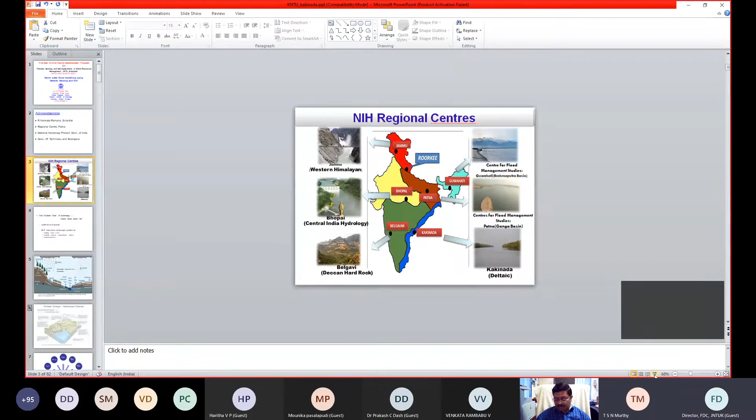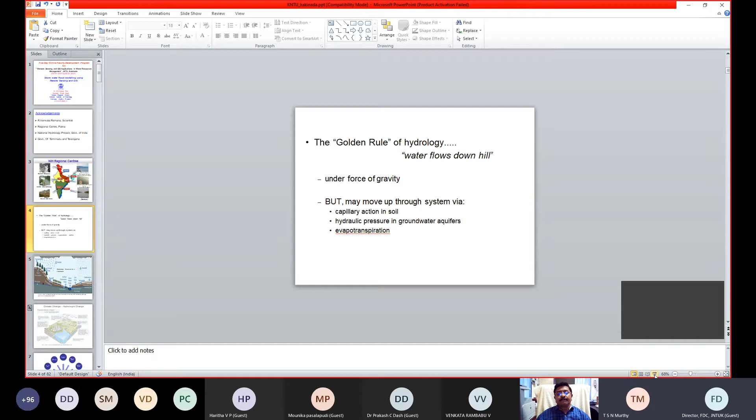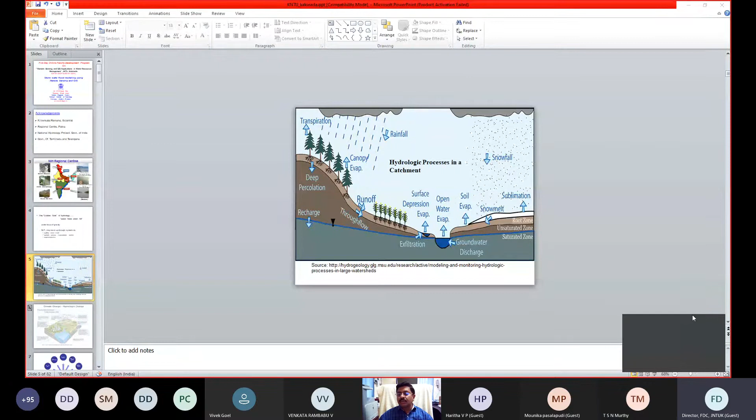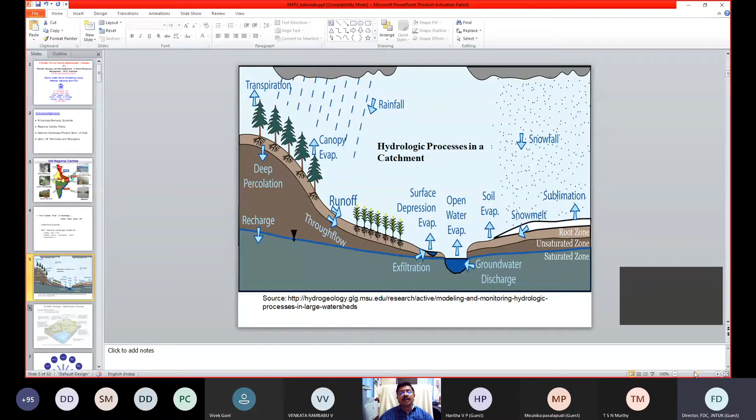Sorry, sir, sorry to interrupt, sir. Your PPT is not moving, we are still seeing only the first slide. Oh, really? Now, which slide is displayed at your end? Only the first one. I have already gone to the 4th slide. Please stop sharing and restart it, sir. Now it is okay, we can see the third slide. We can see the different slides, but not in full screen. We can zoom it on our screen. Okay, without wasting much time. Shall I continue under this mode? Yes, sir. Continue, sir, please. It is perfectly okay, sir. Okay, fine. Thank you.

So with this diagram, what I want to say is when you talk about stormwater flooding, stormwater is nothing but rainwater. Why do we call it stormwater? When the rainfall excess converts into runoff, that particular storm which directly creates runoff, we call it stormwater. So the moment rain falls on the surface in urban terrain, when the top 20 centimeters is impervious, what will happen? Immediately overland flow takes place, then slowly it gets converted into runoff.

If you have a natural surface with good infiltration, then it will convert to deep percolation and go into groundwater recharge. Here the blue line indicates the groundwater table. We are very much interested in the process of the first 20 centimeters, because the moment it exceeds the infiltration capacity of the soil, overland flow takes place. That overland flow is converted into runoff and immediately joins the stormwater drains, whether roadside drains or properly designed ones. Otherwise, what will happen?

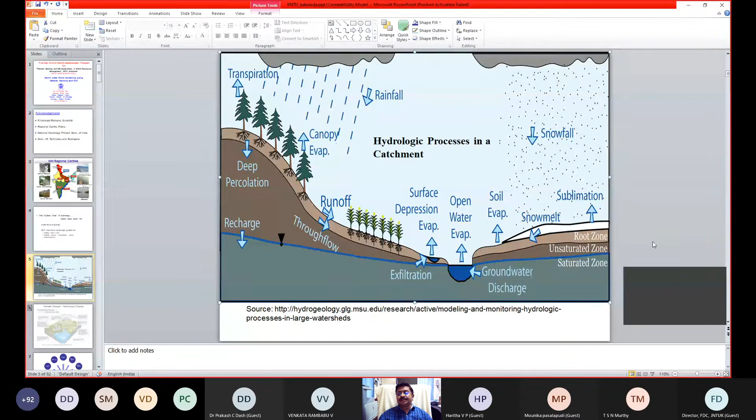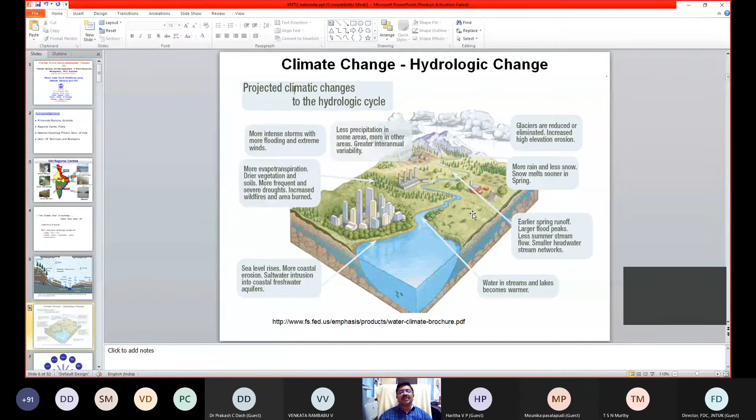Now we are talking about climate change. One is the big way it is coming into the natural hydrological cycle, and sometimes it is disturbing. More intense storms with more flooding and extreme winds - there are predictions about the hydrological cycle, whether it is sea level rise, floods or droughts. Extreme hydrological events are going to come in future. That is one of the projected climatic changes from a hydrological perspective.

Look at this particular diagram. We have classified into various themes the impact of climate change, in the perspective of stormwater flooding. So it will come to this angle.

Change in runoff pattern - that is one of the most important aspects. Another important point is decrease in number of rainy days; that is most important from the hydrological perspective. And another important factor is increasing rainfall intensity and change in monsoon pattern. These things are very important when you talk about stormwater flooding.

Why is it so important? Let us take a small example. Suppose in the month of August, total rainfall is say 20 centimeters, 200 mm. Earlier this 20 centimeter rainfall used to occur over 14 days. Now the same amount of rainfall is occurring in 7 days.

So now you can visualize which event is more beneficial for us. As a hydrologist or water resource expert, he would always prefer the 20 centimeter rainfall to occur over 14 days instead of 7 days. Because even though it occurs in 7 days, if all your water bodies and reservoirs are already filled up with antecedent rainfall events, then you cannot store this water, or you do not have time for it to infiltrate into the subsurface. It simply overflows and joins natural depressions, water bodies, rivers or drains, and travels quickly to some other area. So as hydrologists, we prefer a 20 centimeter rainfall occurring over 14 days rather than the same amount occurring in 7 days.

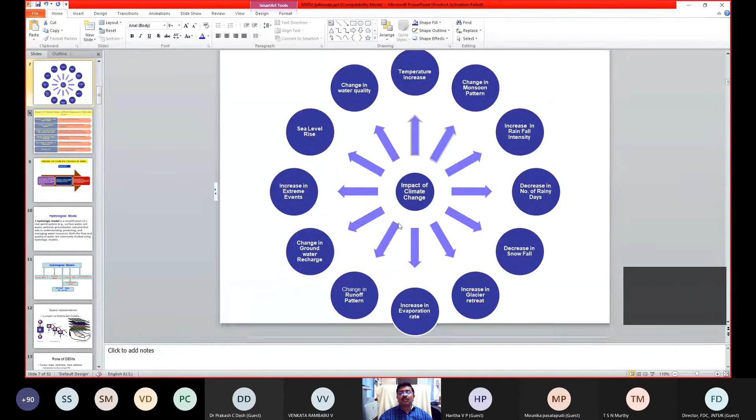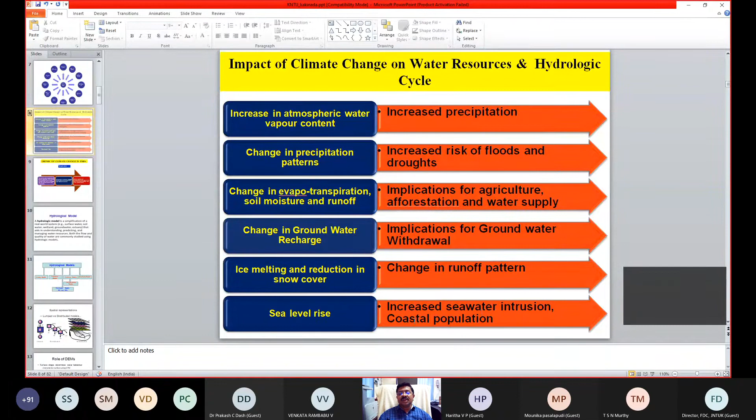A small change in the hydrological cycle will inherently affect various processes and parameters, and ultimately it reflects in our day-to-day activities. These things are most important, especially sea level rise, especially in coastal towns like Mumbai, Calcutta and others. They are struggling with increased seawater intrusion affecting coastal populations - all these are affected areas. So one should try to visualize to what extent climate change will affect our hydrological parameters.

Similarly, temperature is also one of the very important aspects. Mean annual air temperature rose at 0.57 degrees centigrade per 100 years during 1881 to 1997. This is a very interesting statistic. Then somebody said, okay, 100 years, 0.57 degrees centigrade, what will happen? Nothing will happen, this is very minor, but it is not so.

I will give another example to visualize the temperature change. If in a human body, normal temperature is 97.8 Fahrenheit, if I am right, if it reaches 100, then the entire human body metabolism will be disturbed, and you will get headache, fever, etc. Temperature change is very small, but the entire system collapses.

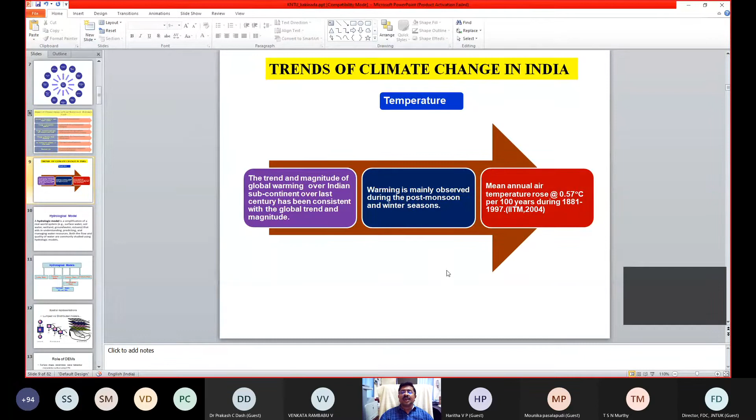Similarly, if Earth's temperature rose by half a degree or 1 degree, you can't imagine the type of impact that takes place in terms of flora, fauna, and all climatic parameters. That's why researchers are much more worried about this temperature increase of the Earth. So this is the most important.

With this background, now we want to work with hydrological models. A hydrologic model is a simplification of a real-world system that aids in understanding, predicting, and managing water resources. Both the flow and quality of water are commonly studied using hydrological models. So any hydrological model is capable of tackling your quantity and quality issues. That's what we are working on.

Remember, a hydrological model is not the only solution. It is one of the solutions to understand our system or manage resources. It is something like, as engineers, we use a calculator most frequently in day-to-day calculations. Why is a calculator required? A calculator is a tool where we can perform arithmetic operations very fast and most correctly. With these two advantages, we go for a calculator.

Similarly, hydrological models are tools which use remote sensing and GIS as input parameters. These models also help us understand the relation between various hydrological processes, and how they are dependent on each other. If you increase rainfall by 10%, what could be the changes in other parameters? We can do such analysis at reasonable accuracy. That's why we use this tool as a hydrological model.

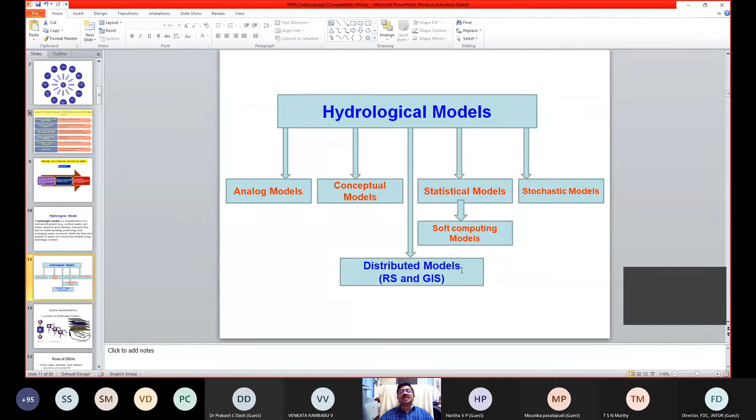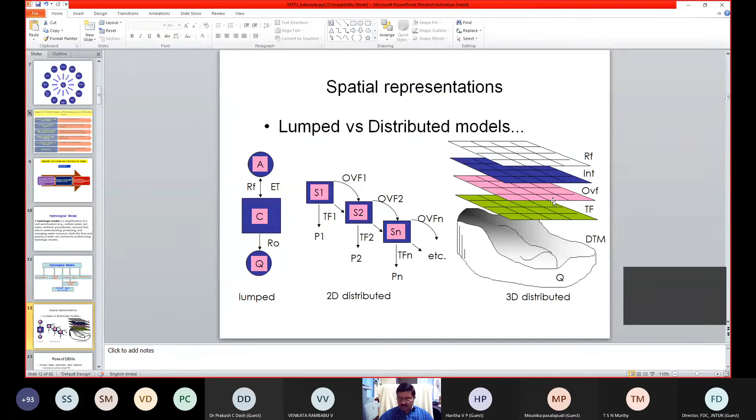Can you imagine our very old engineers earlier? They used to work on hydrology from the Survey of India topo sheets, where they would get the drainage pattern. From that, they tried to estimate the drainage density, the first order length of the slope. At that time, before the remote sensing and GIS advantage, they used to have a curvimeter, planimeter, and all that stuff to get the catchment area. They used to work by hand on Survey of India topographical maps.

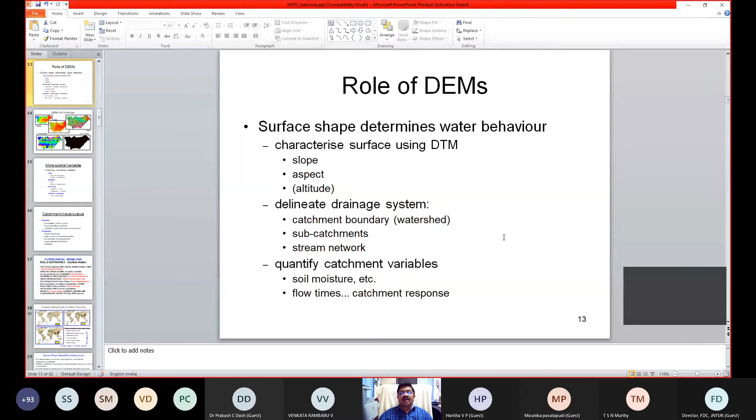Now with the advantage of DEM, we can do the entire work within no time. This is one of the biggest advantages in water resources, handling of our DEMs. If you get a better accuracy of the DEM, then you definitely come out with good accuracy in your quantification of the runoff, or sediment, or any other parameters. So these are some of the DEM based thematic maps which we can derive in a GIS framework very easily.

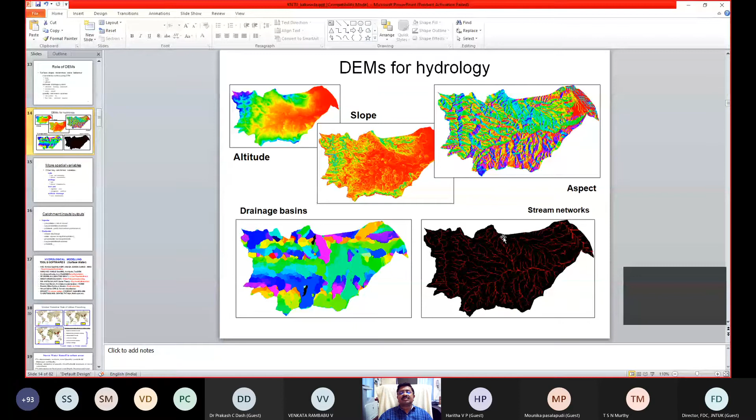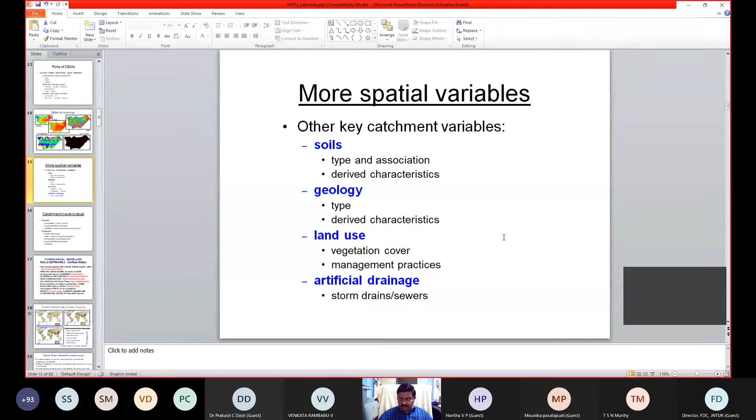Apart from those parameters or thematic maps, we also have to have soil information, geology information, land use, and artificial drainage. Natural drainage you will get from the DEM, but especially artificial drainage like stormwater drains, sewers, and all those things, we have certain limitations, because you cannot get these artificial drainages very clearly in the public domain DEMs. So this is one of the limitations, on artificial drainage. Otherwise, the rest of the things we can handle very nicely.

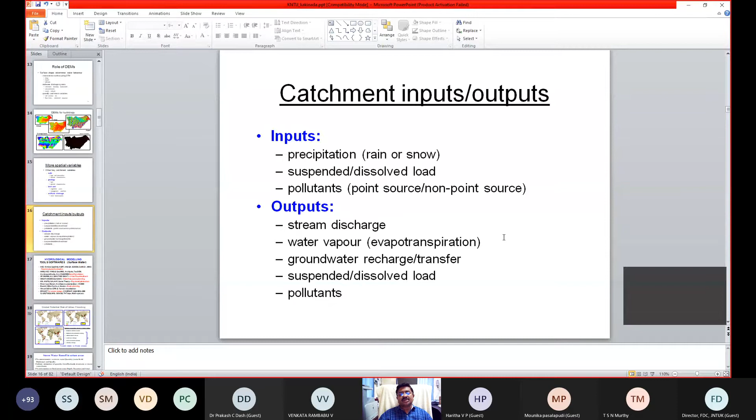In any hydrological model, we have two sets of parameters, input parameters and output parameters. As input parameters, we basically have precipitation and suspended load or pollutants, and we have outputs like stream discharge, water vapor, groundwater recharge, and pollutants.

Okay, now I made a small attempt, especially with this type of gathering where most of the research scholars and faculty members are associating in this faculty development program. I tried to put some of the very popular models which are available commercially and in the public domain in the entire world. So these are some popular hydrological models. Anybody interested can Google it and know better what the purpose of each particular software is. If you know a bit about all these softwares, then you can really choose depending upon the circumstances, the project, and the situation where you want to use modeling as a tool to solve real life problems. So for that, this slide is very useful.

Okay, there are some models like HEC-RAS, HEC-GeoRAS, all GIS based softwares mostly. Some of the things which I have highlighted in red color are the purposes where you can straight away pick up the things. We are interested more in urban flood, sediment, etc. This is the SWMM model, where we will see subsequently some case studies using this model. And XP-SWMM is the commercial product of the public domain SWMM model. Okay, so these other models are used for various purposes in hydrological investigations.

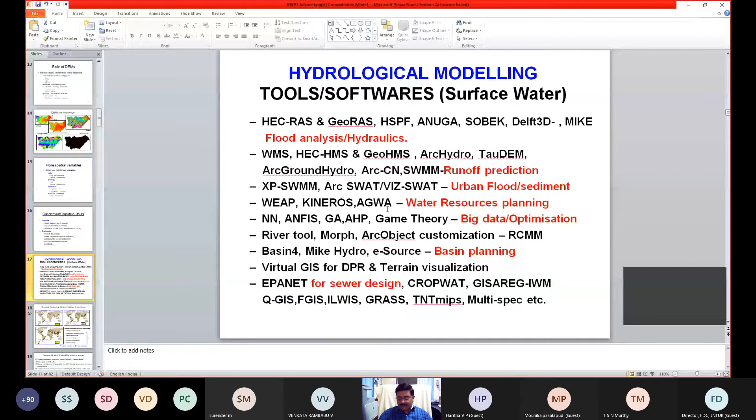Okay, next. Look at the situation of the urban flooding scenarios from 1970 to 2025. You can see the red spots are increasing, not only in India, but in many other places. Why I'm showing this particular figure, look at this carefully: multiple and uncertain drivers for future change. These are all the changes which are going to come in the future, and because of these changes we are getting transient shocks versus chronic stresses.

Shocks we already got. One shock recently, the Hyderabad flood, is a big shock for us. For the planning engineers and decision makers, the entire thought process has changed now. They realized the importance of the water bodies and connectivity between water bodies, the importance of the stormwater drains, and how to divert the flood water during extreme events.

So each natural event will change our thought process. Earlier we have not considered climate change scenarios in our designs. Now whoever is doing any hydrological designs, they put an eye on the projections which are available up to 2090, 2080. So that data also they are trying to put in designs, validate it and check whether our designs are safe or not.

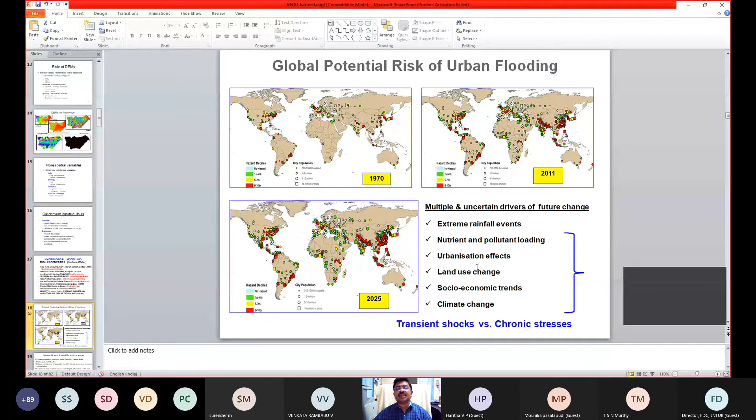Extreme rainfall events, nutrient and pollution loading, which is unknowingly increasing exponentially in the surface water bodies as well as groundwater, urbanization effects, land use changes, socio-economic trends and climate change. Because of all these parameters, we are having more stress on the natural resources, and we are even witnessing some disasters in recent times. For that purpose, it has become very popular.

And these are our experiences after conducting a few case studies in cities like Chennai, Hyderabad and Patna. We got some very quick observations, which I would like to share with the participants here. No measurements on stormwater quantity. When you start working on modeling, no measurement, no data is available. You will hardly get maps showing the cross section of the existing drain. That's it. At a particular rainfall event, what was the water level in the stormwater drain? Nobody monitors it. Then we start working in an indirect way, using hydraulic structures to get some quantity information.

Then in a city or any town, there is no official information on flood prone areas of any municipal corporation or city like Hyderabad, Chennai. They should display everywhere in that city that these are the flood prone areas with respect to some rainfall events, so that people themselves realize, oh, our building is in a flood prone area. Whenever rain comes, we should have an eye on the forecast mechanisms. Such maps should be widely displayed in schools, offices, everywhere in the city, because flood prone area information is very useful to the common public, so they can visualize where their house, office and school are located. So in every city these maps are to be prepared. Flood prone areas of urban areas, that is most important.

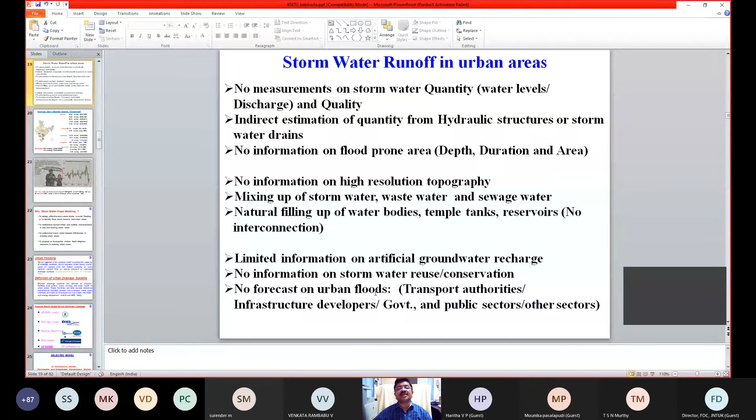That's the most important aspect. Because you're all faculty members, I would like to share one particular point in a lighter sense. When my son passed 10th class, immediately I got so many calls, SMS and all those things. They introduced themselves about the intermediate college, and at that time I was really surprised how these people got my number, how my mobile was flooded with the information.

So whenever a natural calamity is going to come, all our mobiles should get flooded with the information that wherever you are living, you will get this type of rainfall or flood and all those things. Nowadays, I was very happy that whenever thunderstorm predictions are coming into the mobile, IMD people have made some mechanism. So a small alert will come into my mobile: in your area, in the next 1 hour, 2 hours, thunderstorms are going to happen. I felt very happy to receive such alerts, which can save many people from natural incidents.

So that is the state of the art, and people are transforming research results in whatever possible way to reach the common man. That is a challenging task. So let us have a small glance at the highest daily rainfall events, because after working on a couple of studies, I always record these highest rainfall events across the country, especially in South India and some popular cities. In Mumbai, can you imagine, in 2005, 94.4 centimeters per day. We never recorded that anywhere in India.

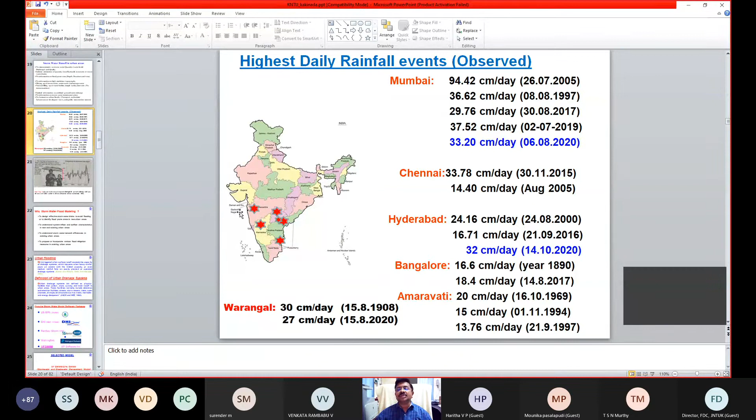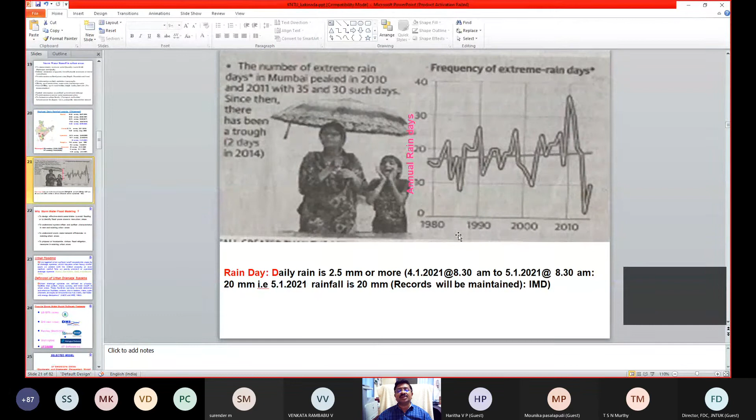And the other extreme happened in 2010 and 2011, the highest rainy days, then immediately in 2014 we got just 2 days. So this is the order of the day where we can have this information. The number of rainy days is so important in our present analysis.

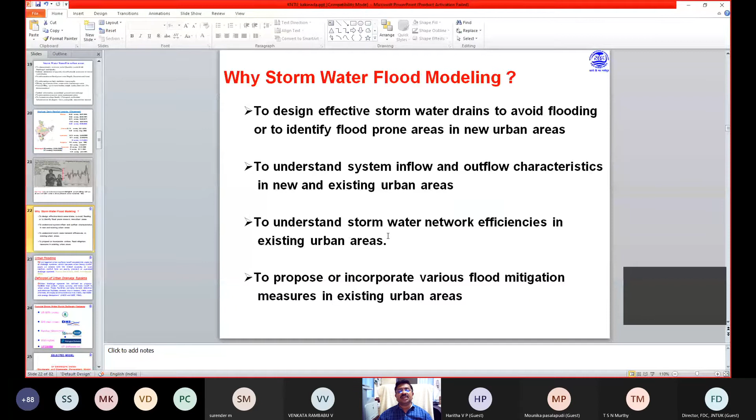Most important is to propose or incorporate various flood mitigation measures in existing urban areas. So this hydrological modeling is useful under these circumstances. Okay. Now next, I don't want to give an example. We have only half an hour with us, and urban flooding is different from riverine flooding.

So one should understand here, urban flooding is triggered when surface runoff exceeds the capacity of the drainage system. That means when you want to divert rainfall into the drains, if drains are designed under capacity, what will happen? It overflows. That overflow also creates flooding on the roads and all those things.

Okay, so this happens when heavy rainfall pours on sewers with limited capacity, or even medium rainfall falls on a poorly planned or operated drainage system. What do you mean by operated drainage system? Are you really operating any drainage system? Operated drainage system is something related to maintenance, interconnectivity of the drains.

If the connection is not properly maintained, what happens? Then the joint will blow up. A lot of stormwater will come out on the roads. Okay, poorly planned means we have not designed properly. Okay, so a lot of siltation is taking place, a lot of plastic.

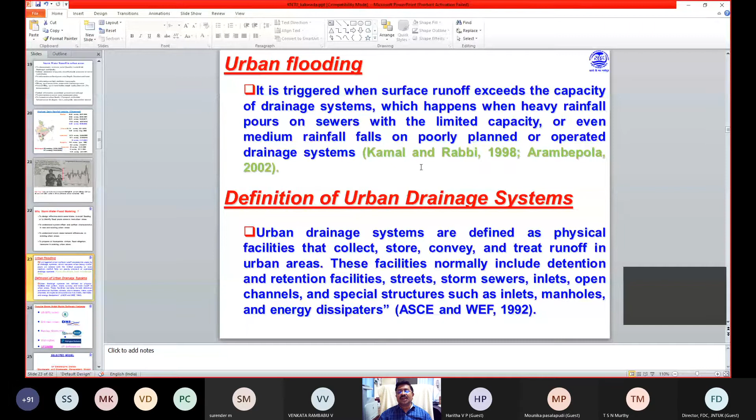So these things are very, very important, maintenance and those things. Design is one aspect, and the other aspect, operation and maintenance, is very, very important. As I said, I have listed out the hydrological modeling softwares. Here I show only those related to stormwater flood modeling, which are very popular across the entire world.

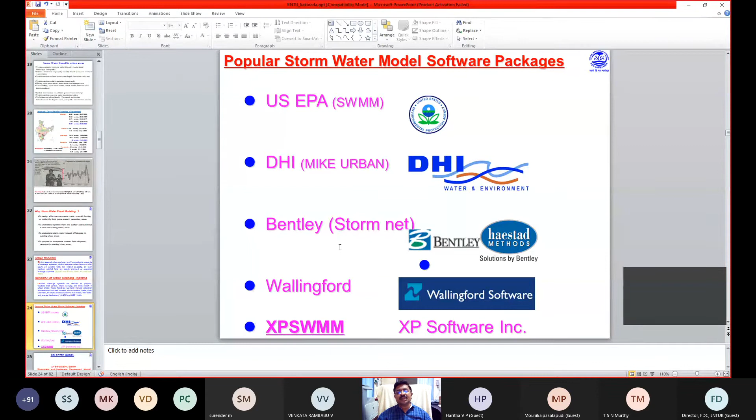We have US EPA public domain, and we have DHI commercial software, Bentley StormNet, Wallingford tools, and XPSWMM. We got an opportunity to work with two softwares, and even though NIH has DHI MIKE URBAN, at Kakinada Center we worked on the first and last two, both the public domain and commercial software. These two have the same engine, but the working style is a bit different. So these are all very popular softwares.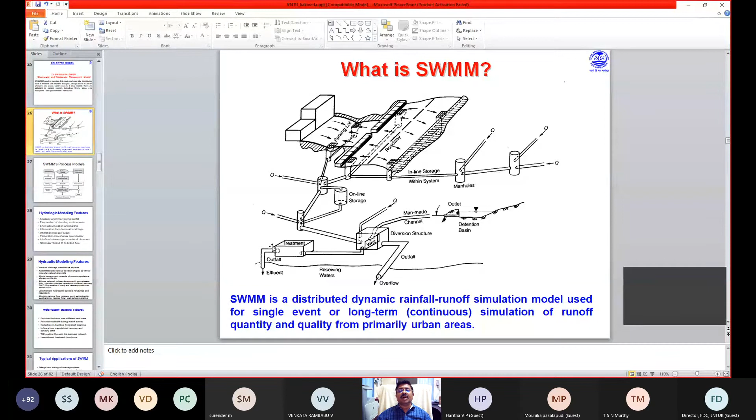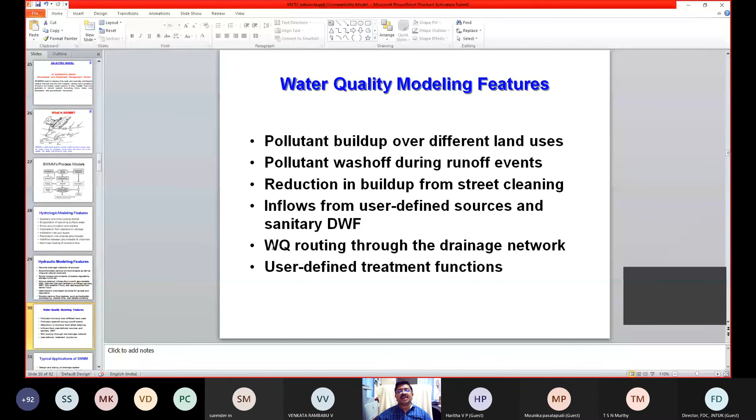So now I want to skip the details about SWMM, how it works and all, because I want to give more feel about the case studies, how we have done them. So I want to skip 3 slides. Of course, SWMM is capable of tackling quantity as well as quality.

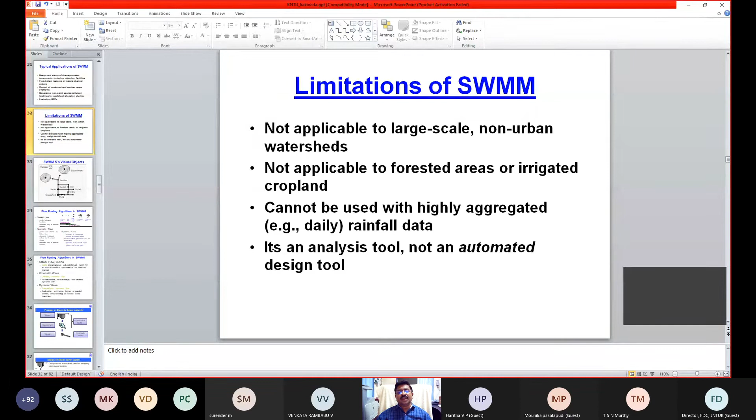Then the limitation of SWMM is that this software is not applicable to large-scale non-urban watersheds, not applicable to forested areas or irrigated cropland, and cannot be used with highly aggregated rainfall data. That means beyond daily rainfall, there is not much use. Okay, monthly, weekly, yearly, we cannot use. There is no use basically. Okay, these are some of the limitations of the software.

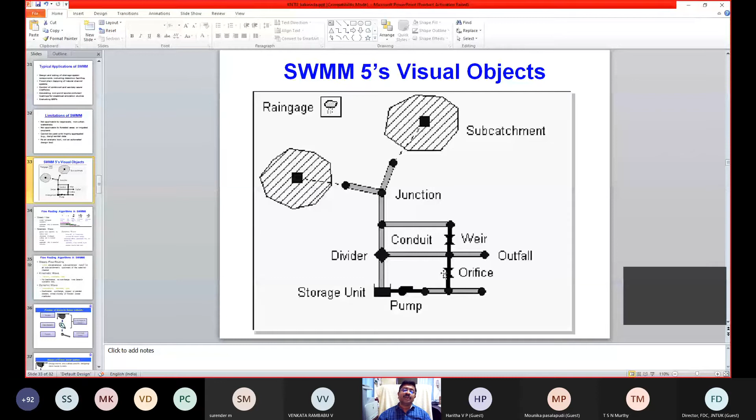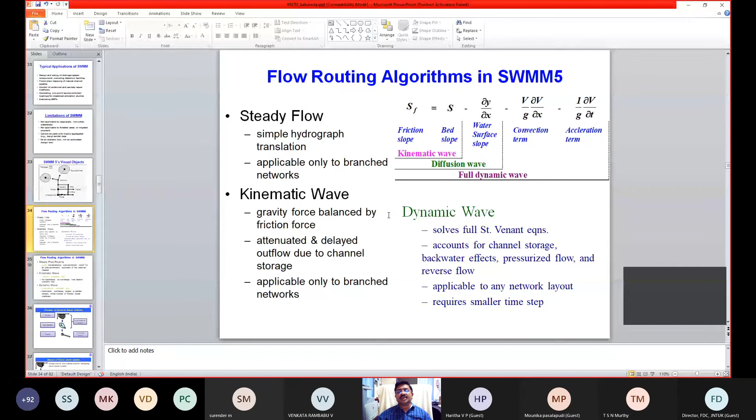So in a nutshell, when anybody is working on stormwater modeling, it is a combination of hydrology and hydraulics. This is a classical combination of the two subjects together. Then we can effectively solve these issues. These are the basic equations which are used to solve the kinematic wave, diffusion wave, and fully dynamic equations. These are the basic equations we used in this modeling. Then we have the unsteady.

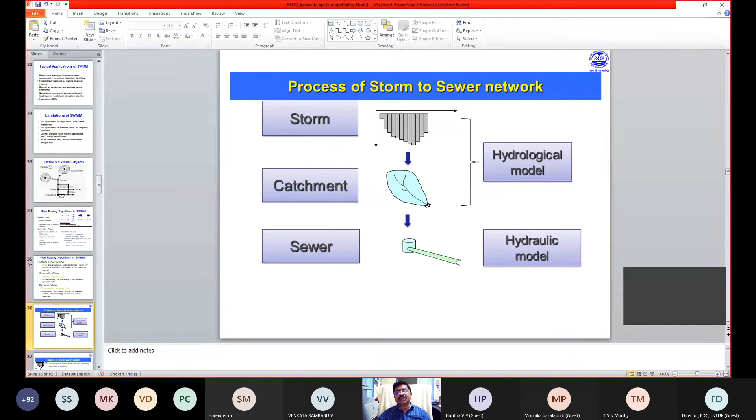Now look at this better representation of the same diagram here. This is the rainfall event. It is falling on the catchment, an urban catchment. Converting rainfall into runoff is the hydrological modeling, and routing of this runoff through these drains becomes a hydraulic model. So these two combinations are very, very crucial.

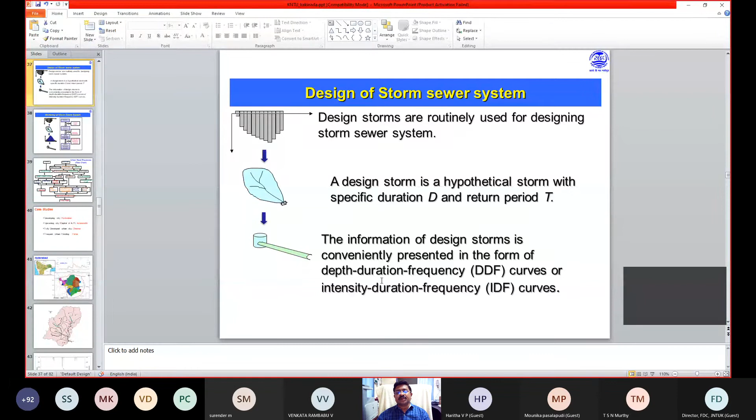Input wise, design storms are routinely used for designing the storm sewer system. A design storm is a hypothetical storm with specific duration and return period. The information of the design storm is conveniently presented in the form of depth-duration-frequency curves, so that we can use it directly in the model.

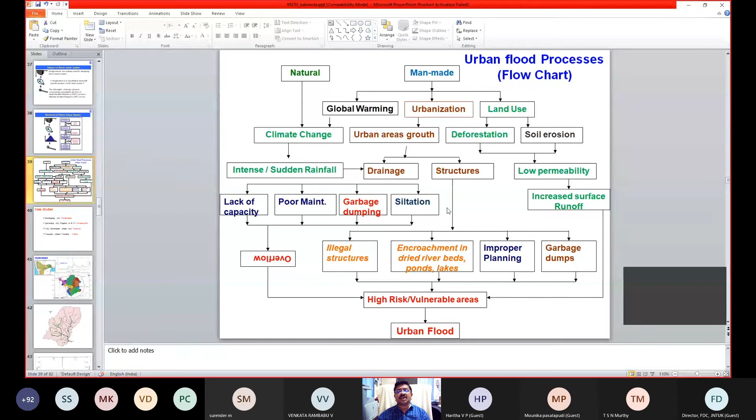I don't want to read the big flowchart here due to limited time, but you can see urban flood processes. There are natural reasons and man-made reasons, and finally both are causing urban floods. Man-made: global warming, urbanization, land use changes. Similarly, drainage structures, low permeability, increased surface runoff, coming straight to the high risk vulnerability zones. These factors are directly or indirectly associated. Not only one town, in any town most of the activities are similar to this flowchart.

So we have a few case studies with us, and one is Hyderabad city. I put it in the category of developing city, and a very new upcoming city like Amaravathi, capital of Andhra Pradesh. Nothing is there. You have the free privilege to design your own storm drainage network, keeping in view the future highest rainfall events. In other towns and cities it is not possible, because the city is already developed. If you want to change any designs, it's highly impossible, right?

I'm giving an example of a fully developed city like Chennai. Even if I come out with alternative designs, who will implement them in Chennai city? There is no scope. Nobody will allow. Lots of issues, political or whatever you call it.

Another city has frequent urban flooding; the town itself is flooded every monsoon because the geographical location is like that. One side is bounded by a river, the other sides by canal systems, and whatever rainfall occurs on the town has no drainage to enter into other places. Whenever there is high rainfall, water levels in the streams and river are very high, so whatever water is collected within the town is absolutely accumulated.

So, 4 different scenarios: developing city, upcoming city, fully developed urban city, frequent urban flooding. These are 4 real life situations. The easiest is the upcoming city; designing stormwater there becomes much easier than solving the flood mitigation of other cities.

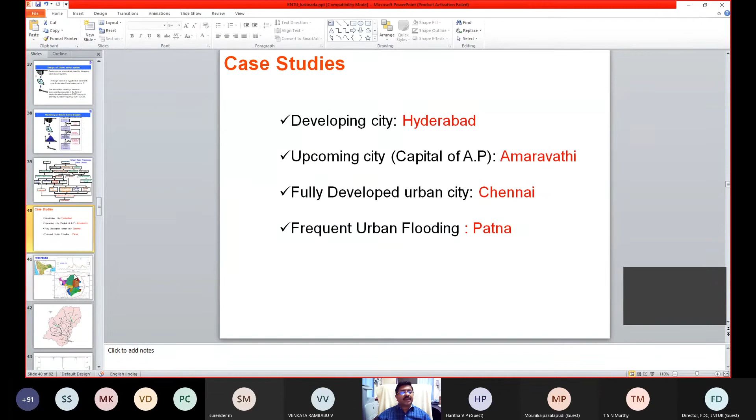Hydrologists start working on the DEM and superimpose administrative boundaries on a subwatershed. These two are different boundaries, and that creates a lot of issues. But in Hyderabad city, the administrative zones are almost equal to the sub-basin boundaries, so water resources can be handled very effectively in these areas.

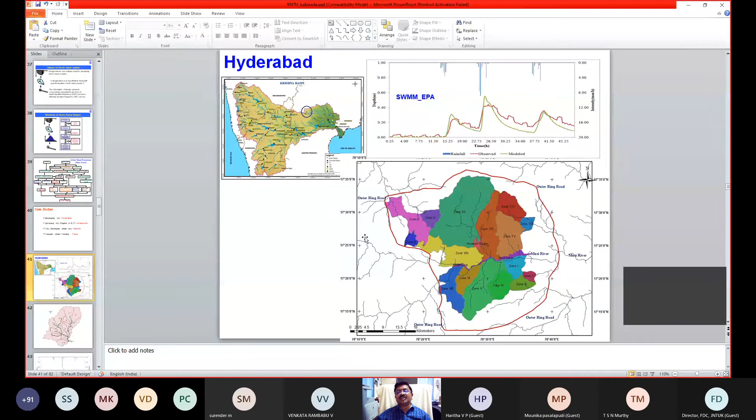That is one of the positive things noticed in the case study at Kukatpalli area. This is the schematization of the entire drainage network, and we were able to finally come out with this type of observed and modeled rainfall events in that particular area.

As I said, you will not get any measured discharges in the town, but in this case we installed our own equipment to measure water levels in the stormwater drains, and we also measured short interval rainfall data in the field. With the help of both these unique observations, this type of modeling is only possible, because validation of the model is very important.

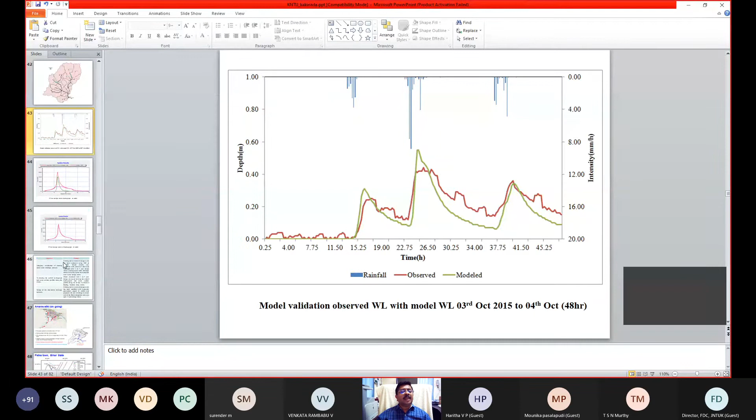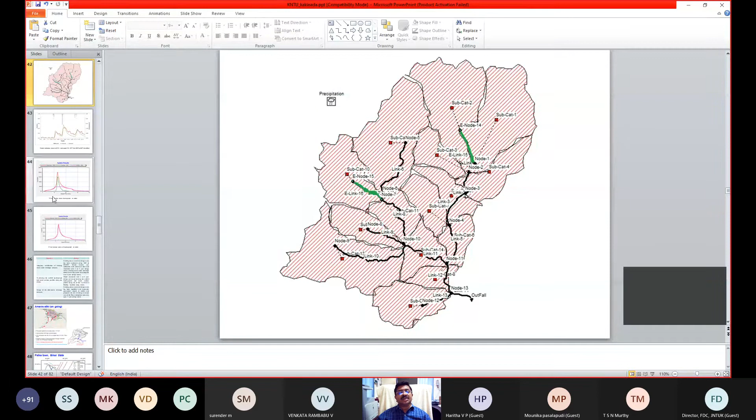Suppose there is no water body at all in this subwatershed, then rainfall minus some losses is equal to the flow observed at this particular point. The same phenomena can be observed in terms of a hydrograph.

So after hydrological intervention, the authority requested NIH to suggest some modifications or new links, so that the green flood portion should not come into the catchment at all. That means whatever rainfall occurs should equal the outflow. Accordingly, we changed some of the designs, assuming that in this particular watershed there is no water body.

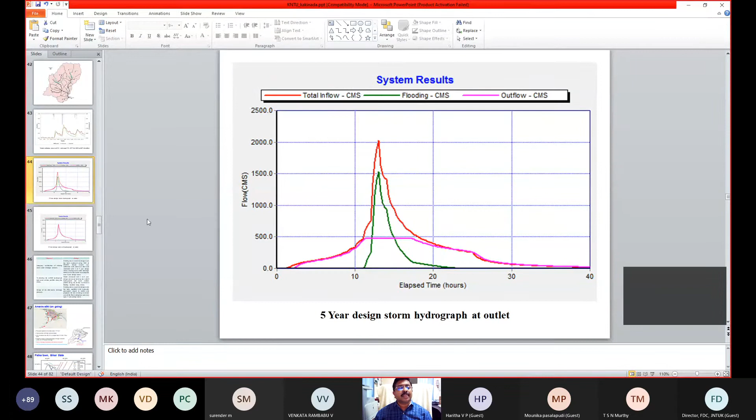So this was checked with the 5-year design storm rainfall event. This is one way of checking what was done in this case study. For an already developed city, where somebody has already designed the network, after 20 years the department wants to check whether their existing stormwater network is safe or not with the coming high intensity rainfall.

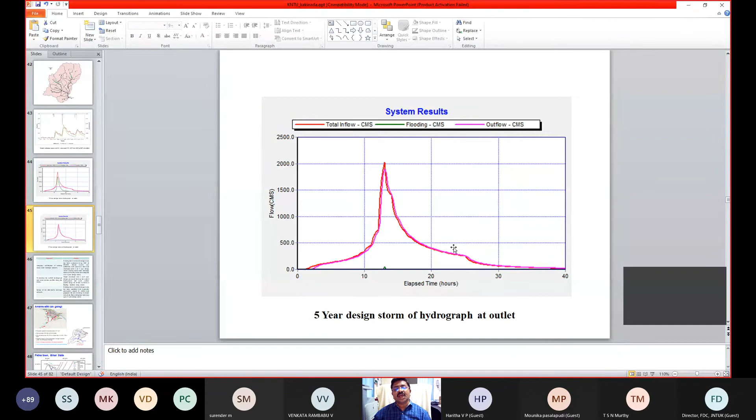They asked if we could give suggestions by adding small new links or diverting some links downstream or otherwise. So we suggested some mechanisms and ensured that the inflow equals the outflow. That is one of the case studies we did for Hyderabad city near Kukatpalli area.

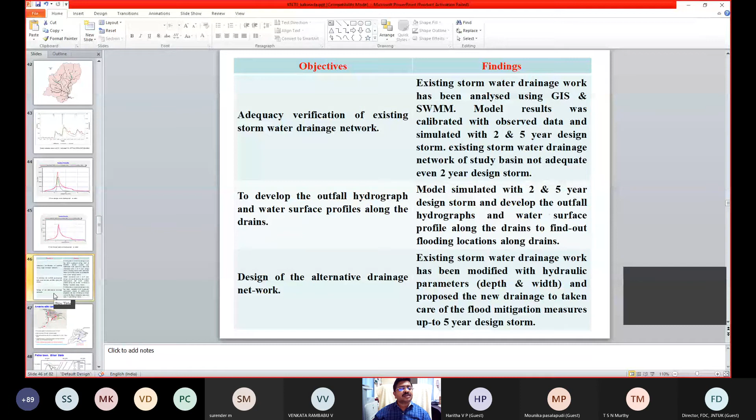So whatever stormwater drains you want to plan, make sure that not only the water falling within the capital area creates flood, but also consider the water from outside the capital area, since there is a big catchment area here.

Whatever flood is created in this area also comes into the capital area, and these two flood waters should be safely reached to the Krishna river. That is a challenging task. Otherwise, upstream flood will come into the capital area. Then how can we safely discharge our flood water into the Krishna river? That is a major challenging issue.

In this case, the bed level of the Kondaviti Vagu is almost equal to, or sometimes below, the bed level of the Krishna river. What will happen? If some small flood comes, backwater comes into this particular Kondaviti Vagu. At that time, if the Krishna river is fully flooded and all of a sudden we get heavy rainfall in the Kondaviti Vagu, tell me the situation - how will the flood water reach the Krishna river because of these hydraulic conditions?

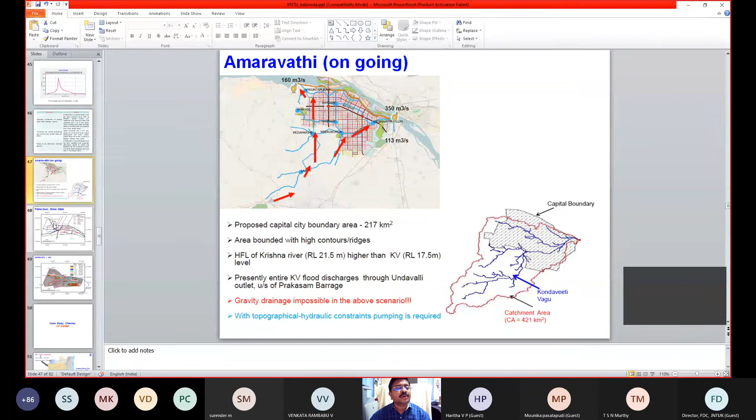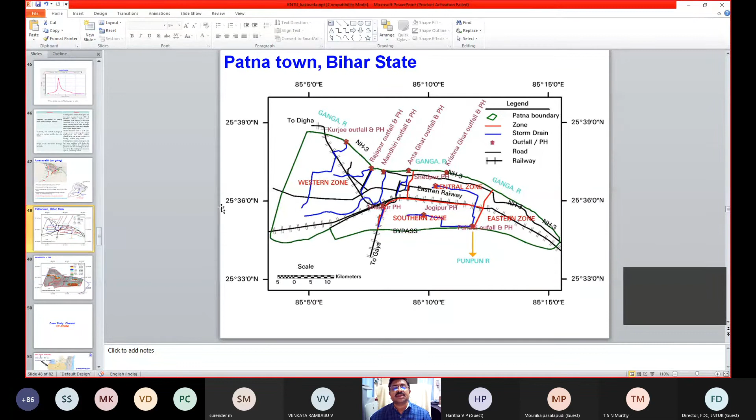Then they asked which rainfall creates how much flooding - we should provide a map with respect to rainfall. We asked them first for the contour information at 1 foot interval, so that we could give a better output for various purposes. With the advantage of that particular DEM, we have prepared this output. Now you can see.

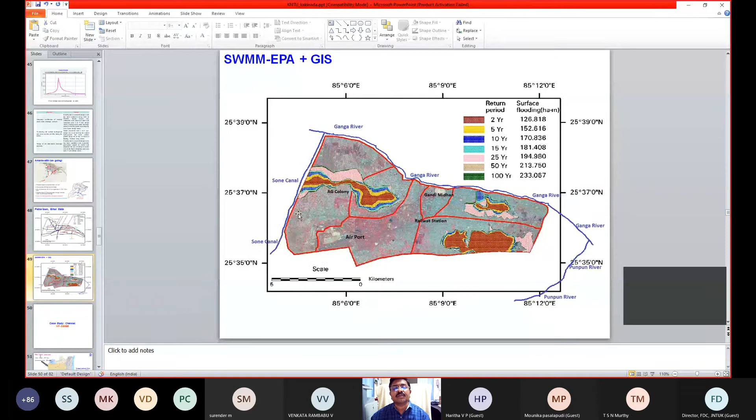Then the third case study is Chennai. I will finish this case study within 10 minutes. For the Chennai case study, I will show the study area - look at this area.

This is not fully based on the administrative watershed - administrative boundaries and watershed boundaries are not equal for all watersheds, except one which matches here. This I have demarcated as the Otteri Nullah. This is a small drain having a catchment of 30 square kilometer area.

They want to solve the flood issue in this particular area. This is the area where they used to get a lot of flooding and a lot of inundation taking place. So here we want to test our hydrological model, how to solve this problem of stormwater flooding using some hydrological model - that is our challenging task.

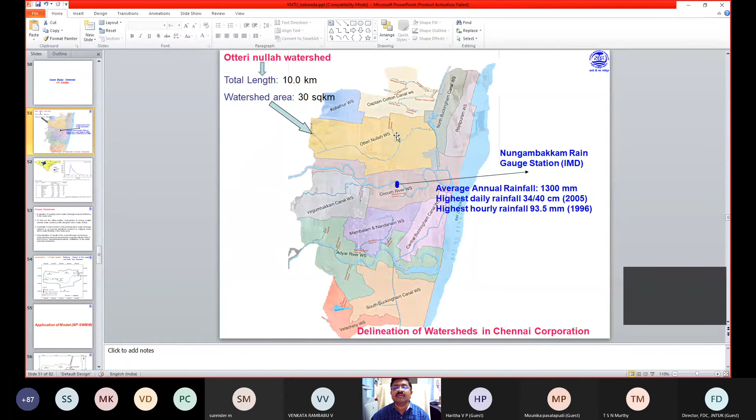To solve the issue we have borrowed a tool that could help us. Straight away, when we initiated this work and looked for data, nothing was available except the IMD rain gauge station very close to this area - that was the only rainfall data, rain gauge data, available with us. We realized that if you want to do a hydrological model in a small scale basin, you invariably have to have observations. So immediately we designed our own network of observations.

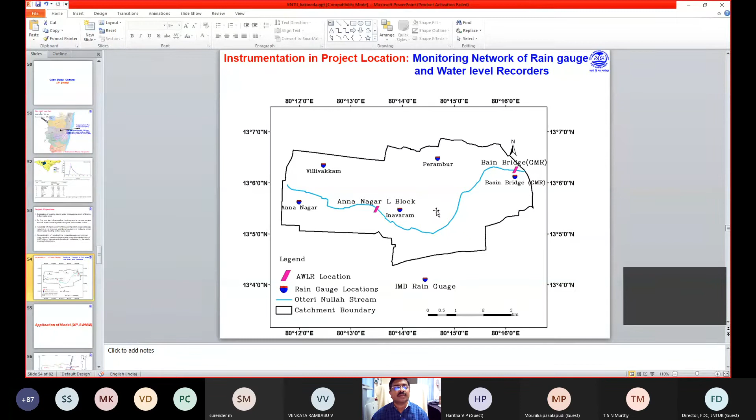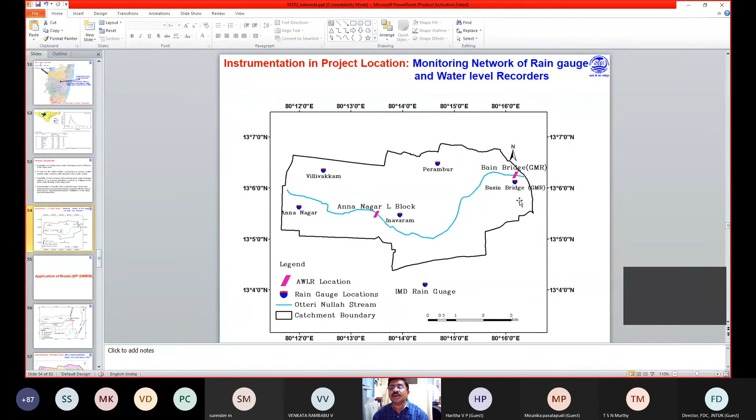Like these are all the rain gauges - we have established the rain gauge network. We also established automatic water level recorders in this small drain at 2 locations. So we started monitoring the water levels as well as rainfall over a period of 2 years, so that we got a good number of spells. Before finalizing this network, we also took into consideration the hydrological boundaries, which I then superimposed. So this is our catchment, and the catchment outlet is connected with the Buckingham Canal.

Buckingham Canal is connected with the Bay of Bengal, and nearby we have another stream called the Cooum River. Why do you need all these things? Because if somebody is working on any basin, one should have an idea about hydrological boundaries. Not only boundaries, we could also see if any reservoirs are upstream, and whether their excess flows will reach into this area or not. There are so many things associated.

Especially if you see Kerala floods, Chennai floods, after the floods the government constitutes a committee, and the committee comments, if you read, this particular sentence is always common: these floods are due to sudden releases of upstream reservoirs. I found this common sentence in many reports. So these things also we have to consider. If you are not considering this and are only talking about the rainfall falling within this catchment, that is not sufficient.

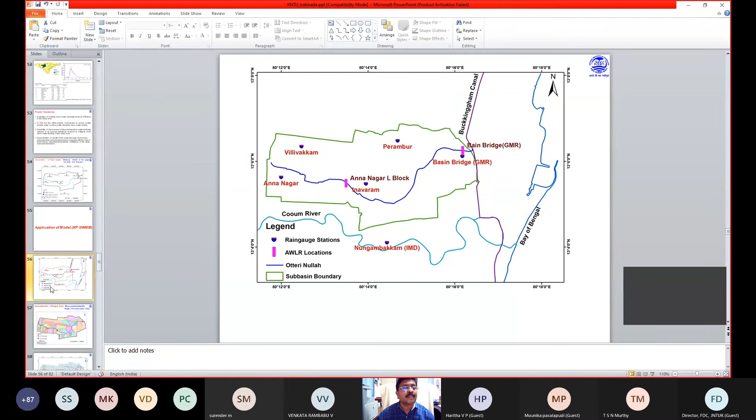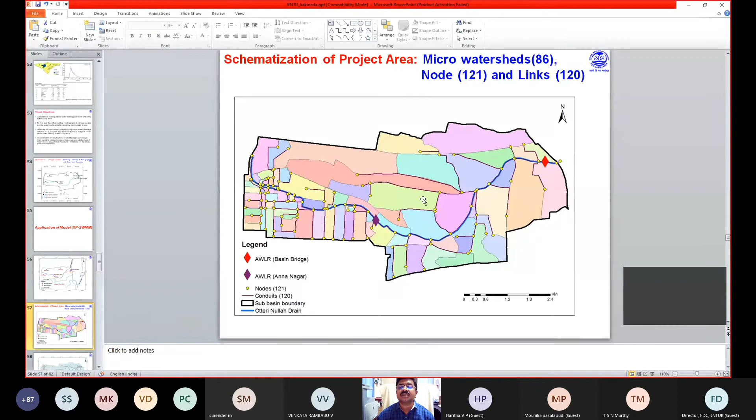So this is our hydrological boundary, and I demarcated the same watershed into 86 micro watersheds based on local drains as well as DEMs. Similarly, I converted this particular basin into a nodes and link model. Then I started working with this model.

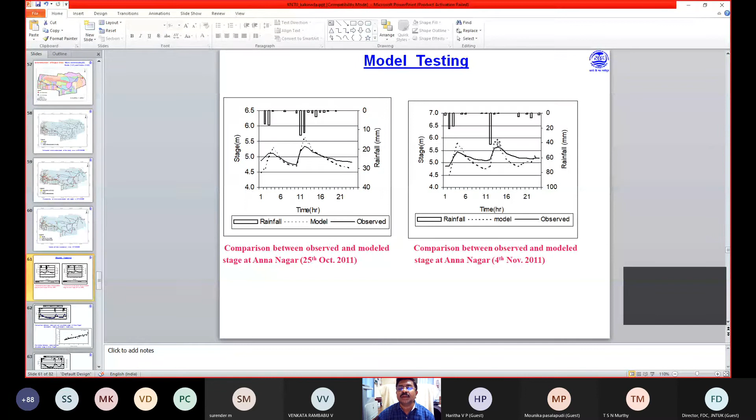Because when you work in the model, you assume a beautiful cross section is available, say a 1 meter rectangular stormwater drain with very nice slopes, and all those cross sections are given to the model. But in the field, there are lateral pipes associated, some sedimentation taking place, or coconut shells there, all obstructing the flow mechanism. Therefore, we noticed that the observed water level is always less than the model water level. So these are the types of things we could observe.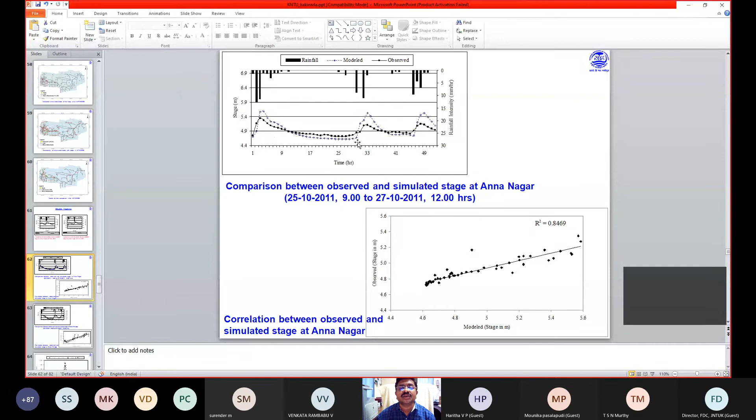Similarly, we have run the long term model also. A couple of 2-day continuous spells that we got in Chennai, we simulated that also. The same thing is observed here also.

So later on, finally, why did we do all this exercise? We wanted to suggest some flood mitigation measures in this particular area. After working on various aspects, we could give the flood warning systems based on the stormwater drains as well as the major nallas combined together. I don't know whether the animation will run or not, but I would like to stop it here.

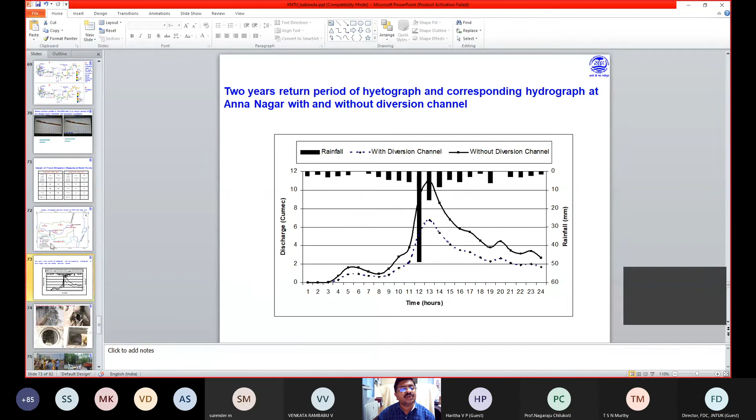Then they asked us, can you say in terms of a hydrograph how much the peak will be reduced and how much water will be diverted? This is one of the classical outputs the calibrated, validated model provided. This is the rainfall with the diversion channel proposed, and without diversion. Without diversion, this is the flood hydrograph in the main Nala. After diversion, this is the hydrograph. So with this confidence, they were able to execute it in the field, and they reduced the urban flooding in this particular area.

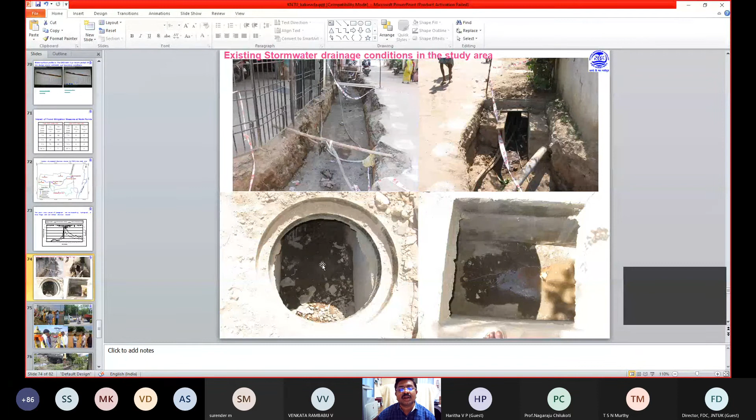Then I'll show you some photographs to check that DEM validation is very necessary. Also, can you imagine if any drain is like this, how the stormwater will move from this drain downstream? So they literally, before monsoon, remove all the material like this physically. They put it and transfer it to some other area and make the drains like this. Then only Chennai is surviving with this type of cleaning mechanism. There is no option right now; they are adopting this technique only.

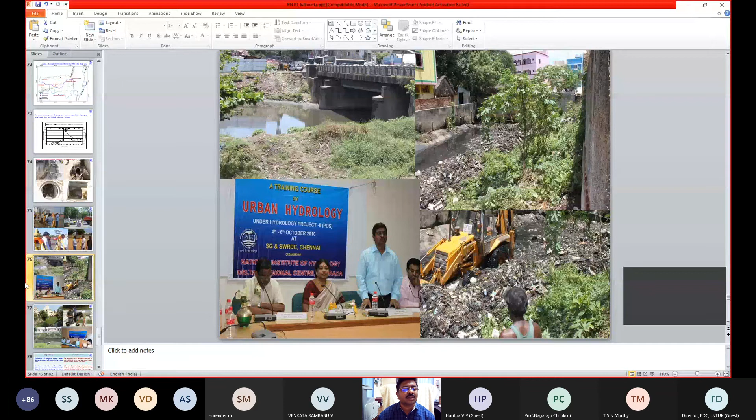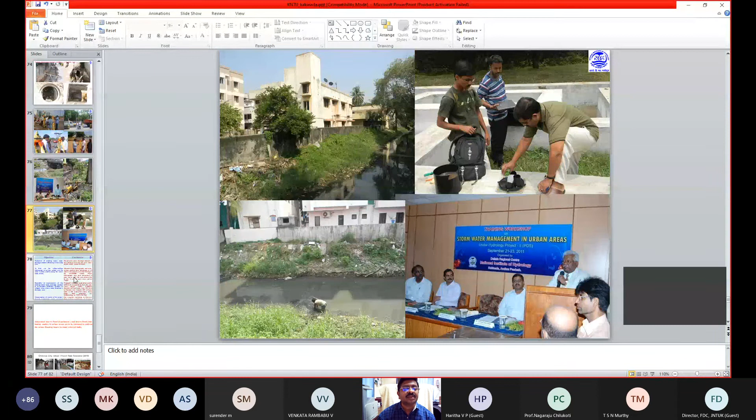Every 15 minutes in the drain, I will get the water level, and it is dumped into the data logger. Monthly once I will go to Chennai and collect the data from the logger. During flood time the water will come up to the boundary wall here. Can you imagine such a huge water runoff will generate in this nala? So that type of water levels we could collect with the help of observed data. This type of solutions are possible, and they are more effective solutions in the field.

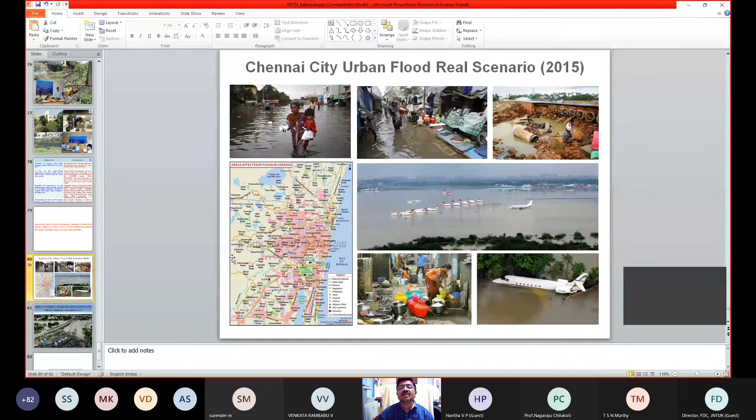So these are some of the photographs which were picked up recently, floods in Chennai. It happened after our study, actually.

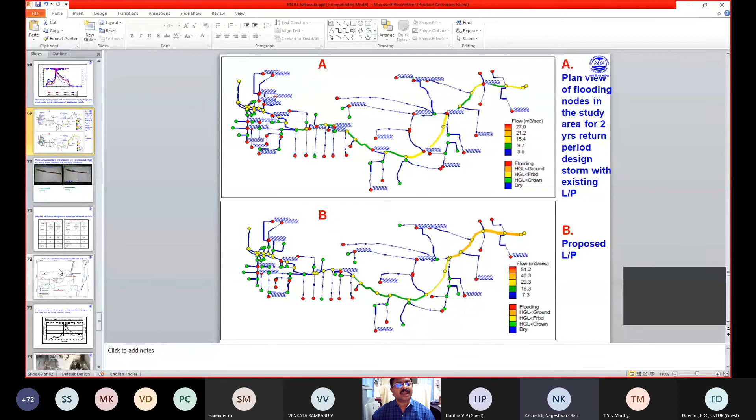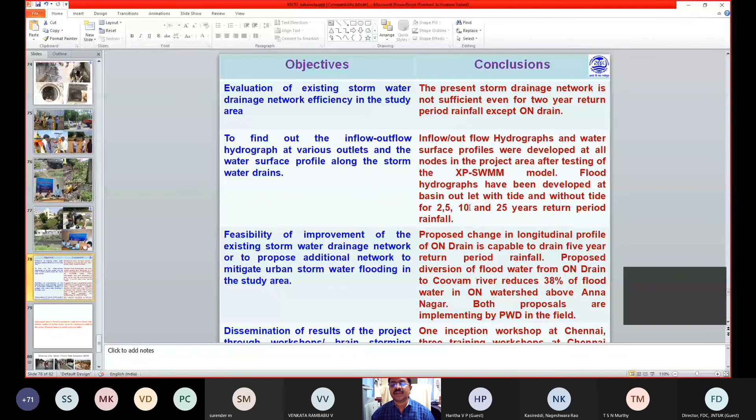Flood hydrographs have been developed at the basin outlet with tide and without tide for 2, 5, 10, 25 years return period of rainfall data. That means these are all different rainfall events, we can call it. Okay. Now, does XP SWMM give the dynamic simulation? Does it show at a time for a 100-year event?

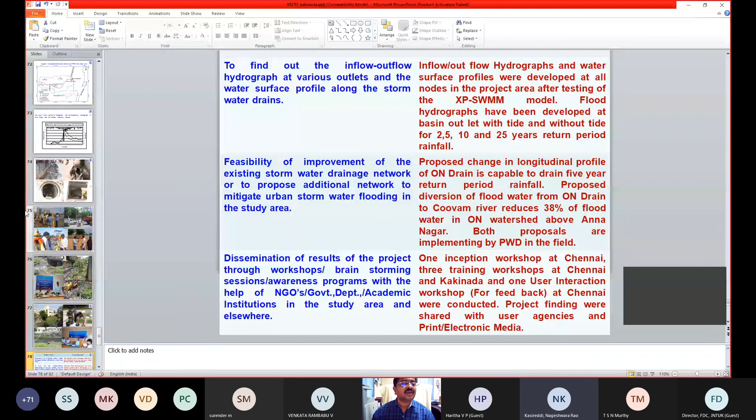You see, my screen is not visible to you people; if I display this thing, you can really see. Let me try this. I don't know whether you can see it or not. There is an animation I can share with you. It will do it in an integrated way. I will show this plan view.

Please tell me if you are able to see it or not. Okay. Are you able to see my screen? Yeah, we can see your slides, actually the PPT. The PPT, fine. I am displaying a video now. Maybe you need to switch over your screen sharing. When you share your screen, you need to select the desktop option in Teams. Now is it visible? No. No.